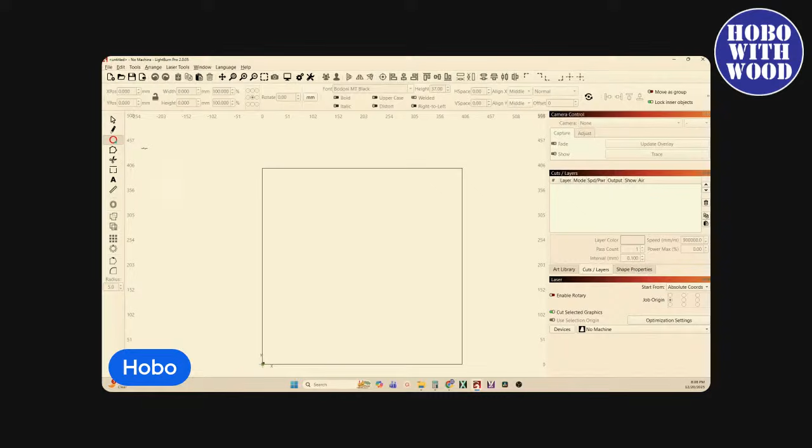So let's jump over here to Lightburn. I'm going to grab an ellipse and start with a perfect circle. I'll come in here and draw the perfect circle, and let's put it in line mode.

All right. Well, I know that my perimeter — and I say that because it's not a circumference, since my head's not round — but my entire perimeter was 24 inches. You can't just put 24 inches in here, because this measurement is the diameter, not the perimeter or circumference.

So how do you get that size right in Lightburn? You divide the perimeter — 24 inches, in this case since we're working with a circle, so it's 24 inches in circumference — by pi. 24 divided by pi.

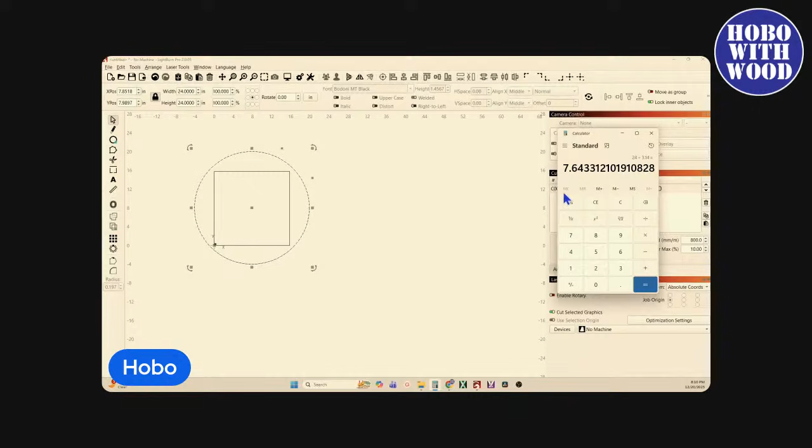So let me clear and switch back over here. If I've got 24 inches divided by 3.14, I get 7.64 inches. So I can take that value, 7.64, and keep my aspect ratio locked until it reads 7.64.

Now, that should be — if I come down here and get my measuring tool and click on this, we should see... yep, right here, the perimeter length is 24.005. So that's 24 inches, which proves that dividing by pi worked. So you take that one measurement, divide it by pi, and that gives you the circle diameter you need to create your first measurement for your hat size, your headwear size.

But our heads aren't round. Yeah, Terry, it's math, but pi is all you need. You need to divide by pi — in a minute we're going to multiply by pi, 3.14. This is about as easy as anything you can do.

Kevin says 24 inches. Holy crap. Well, wait till you measure your own. It's surprising how big that diameter or that perimeter is.

I measured 24 inches divided by pi, and got 7.64 inches in diameter. When we look at the measuring tool of a circle with 7.64 inches, the perimeter length is 24 inches. So there I've got a perfect circle that's 24 inches. But that's not what I need.

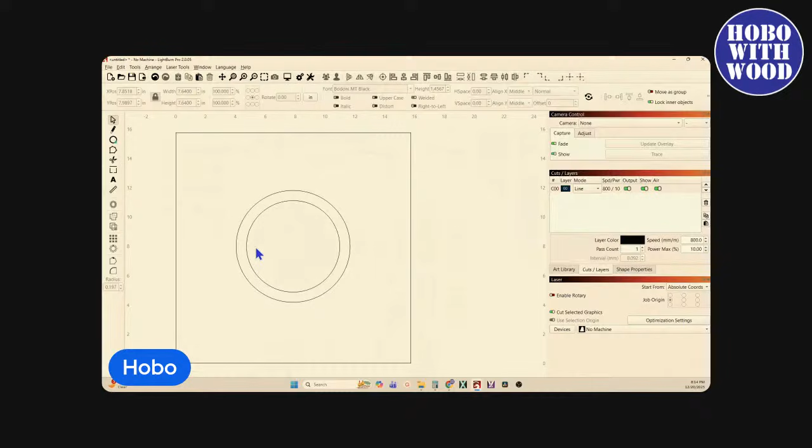I'm going to duplicate this and move it over here just for a second. So I've got my original. This one, I'm going to unlock my aspect ratio, and I'm going to tell the width to be 6 1/4. So now I've got the width correct.

But if I go to my measuring tool and look at that piece, you can see now it's 21.8761 inches. I've lost, was that 2.2? Is that right, 2.2 inches? I've lost 2.2 inches in that total perimeter length.

So I tried doing this by percentage earlier, and it didn't quite work out. Percentages, it doesn't work, but it gets you close. So I'm going to just start increasing it by 10%, and I think I'll probably end up doing 1 or 2 more. But let's see here what the comments are.

When a baby's head is 19 inches at birth, 24 is not that far off for an adult, I guess. Who you calling an adult? Those fighting words. The battery is dying.

Use printed scale on, yeah. Battery's dying, and I just use, like I said, this works. You know how I know this works? Because that's how I got these measurements, and it's a cutting. All right, let's see, no need to remember...

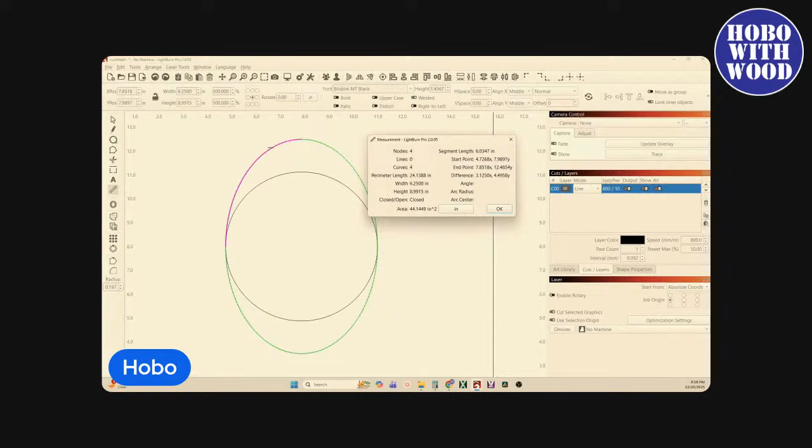So yeah, we'll go down 0.5%, so we're going to say 99.5%. And using the measuring tool, there we got 24.06, and that I'm happy with.

So now I've got the width right, and I've got the total perimeter correct. I use perimeter because it's elliptical, not a circle, so it's not a circumference. Now I've got those two measurements correct. It looks kind of funky, but believe it or not, that's what the head shape is.

Let's see here. Shame the measurement tool doesn't work in reverse - put in 24 inches and it gives width and height for the shape. I don't follow you. I have a hard time comprehending what I'm reading, I've told you guys that. That's the stroke, I can read. I don't always follow, but I'm not picking up what you're laying down there, Chris.

All right, and who mentioned pie? What kind? Sounds good, apple a la mode. Apple a la mode is my favorite.

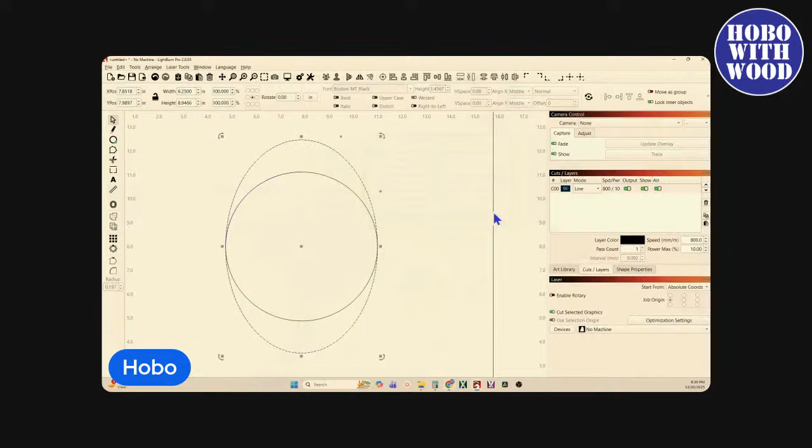So now I'm going to say okay, for the bottom ring, I'm going to take - I can delete that because I got it over here. So there is the shape for the bottom piece. Now I'm going to take that and duplicate it, move it over here so I've got it. Now I'm going to do an offset, an outward offset, in inches, so we'll do 1 inch outward offset and say okay.

Do not delete your original. And right now, let's group those. And there is the ring.

If you're doing this for the first time, honestly, since we're not doing this the way any real - oh fudge, I just forgot the name of the hat maker. Tell me, what's the proper name for a hat maker? I know it, and I just went blank. But a hat maker would never use this technique.

But it's going to work for what we're doing for something we're going to cut with a laser. Mad Hatter, haberdasher - thank you, Grafting Gene, thank you, haberdasher. I knew that, I just couldn't think of it. I'm the Mad Hatter in doing this, and I'm no haberdasher by no means.

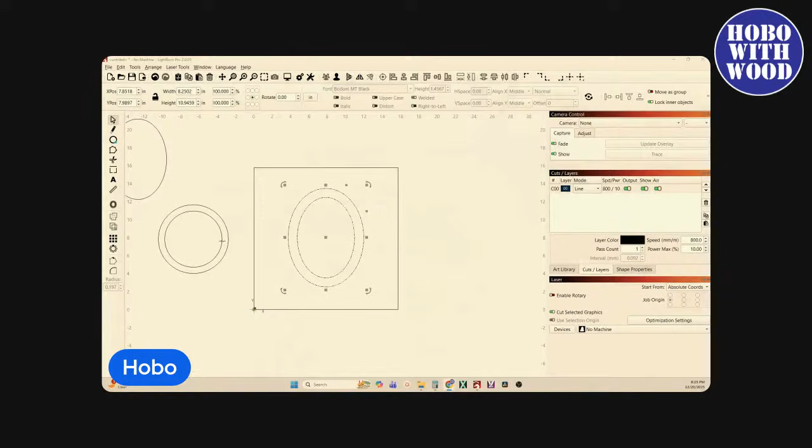So I had measured that and had 6 1/4 inches. So I'm going to duplicate that, bring it over here. And that is - actually, let's see, how...

This is almost finished, I'm having to think for a second. I can simply do a 1-inch offset of that, and that gives me that arc that I needed there.

Let me look here, hold that thought for a second. I don't want to steer you wrong, or tell you something when I've already done a couple of these, because I don't like to do anything I haven't tested before sharing with you. But let me look here.

That and that, and go back there.

What's an elf's favorite candy? Keep it PG. Keep it PG.

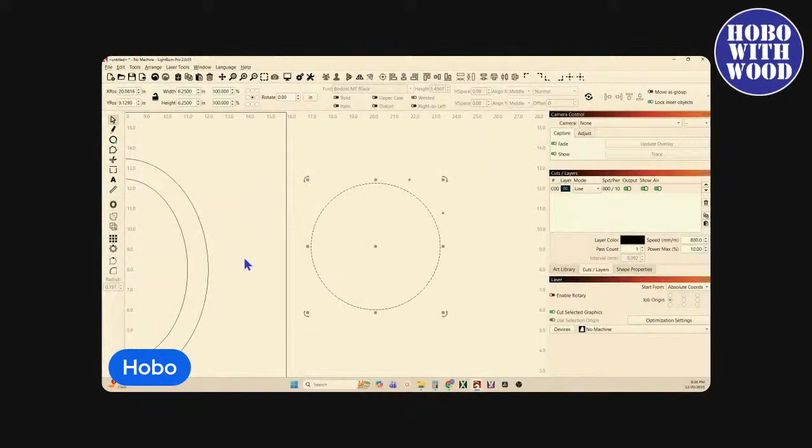Now, swap that back over here. So I've already got this measurement, and that fits from here to here. But let's just give this a 1-inch outward offset, and let's draw a straight line and tell that to go to the center of that.

And now I'll use my scissors. Get my scissors, there we go, and cut away that. So now I've got that piece.

Staple the hat on? No, we're not going to staple the hat on. All right, so switch. The rolly's finished, I've already cut. That's how quick it is, very, very quick cutout. I'm not going to do, well, yeah, I am. Let me switch this over on the rolly.

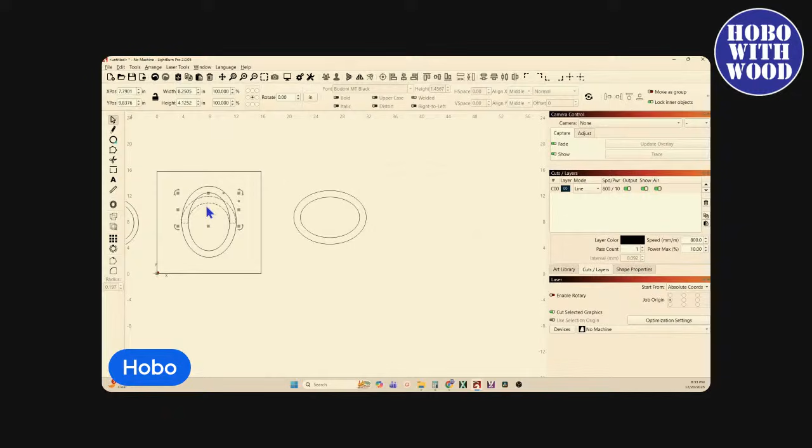And so we've got two of the three pieces that we need to make an interlocking piece. So I'm going to grab this piece, duplicate it, bring it over here, and then rotate it. Now you can see that measurement there. So I need to go from here to here, but I'm going to take this, duplicate it, bring it over here, because this is going to tell me how high this needs to be. I know how long it is from this point to this point, but this is going to tell me how tall it has to be.

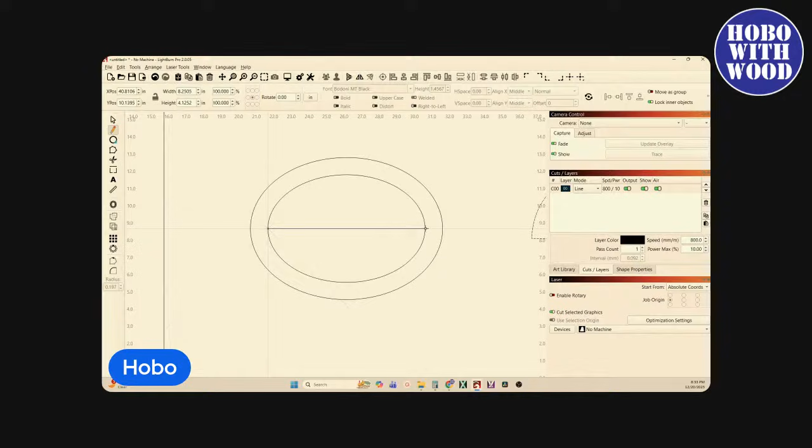So I can come in here and grab me a pencil, and I'm going to come right there to the center point and draw a straight line until it intersects again right there. And there is the total length from minus the offset. So I've got that measurement. So let's grab that.

And this piece, if I come over here and bring a guideline from there, then grab my measuring tool and measure straight down from the center, holding shift till I get to right there. That's 3 1/8 of an inch, or 3.125 inches. Or for you metric loving folks, that's 79.38 millimeters. But I'm going to stay with inches. 3 1/8, 3.125, all right.

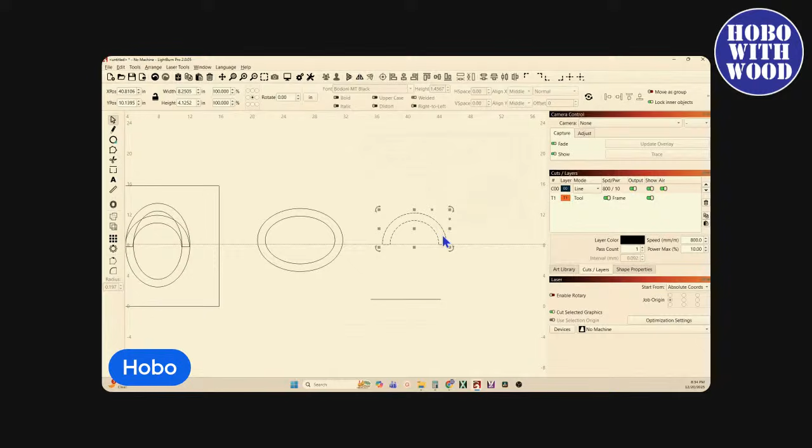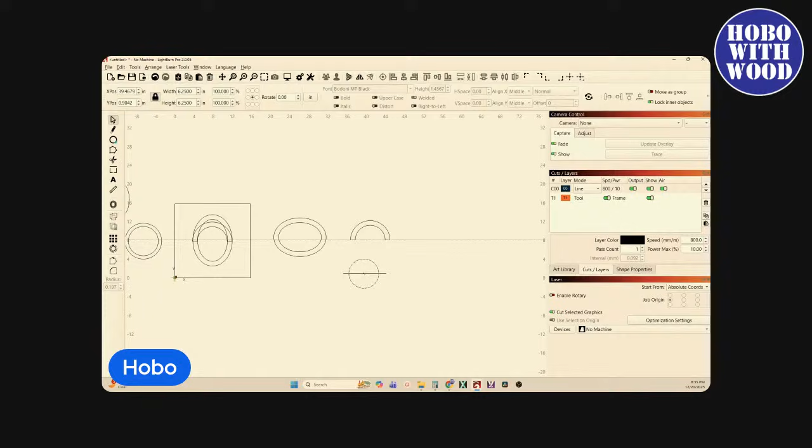So that's a radius. So if I come over here, I need to lock my aspect ratio, and I want 6 1/4, which is what we had a minute ago. That's how high it's going to be, but I need it to be that long. So there is my 6 1/4 centered up over that. Now I'm just going to stretch this out, stretch it out to right there.

Or let's take Control Z. I already know that line's length, 8.9466. So unlock and tell it 8 point, what was it? 8.9466. There we go. And now I can do an outward offset, 1 inch.

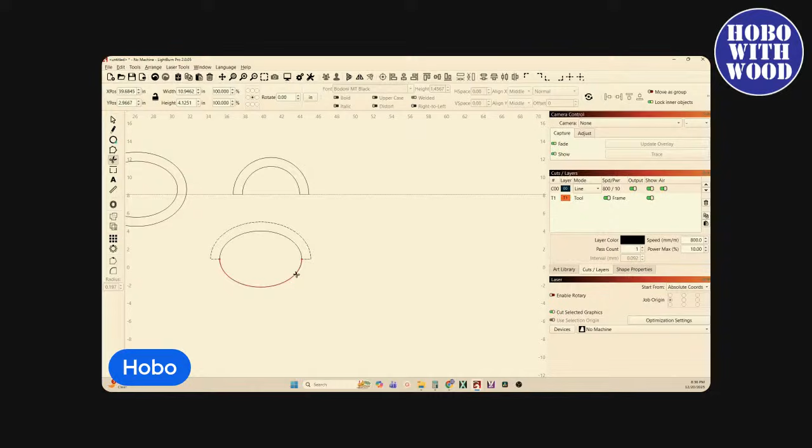Do not delete the original. Say OK. Grab that line, hold my control button and drag it past it. Grab my scissors, cut, cut, cut, cut, and cut. There is my third piece.

So there is my lower brim. There's across my ears, and there's from the brow to the back of the head. So it was that easy and that simple to create the 3 pieces I need to interlock with each other.

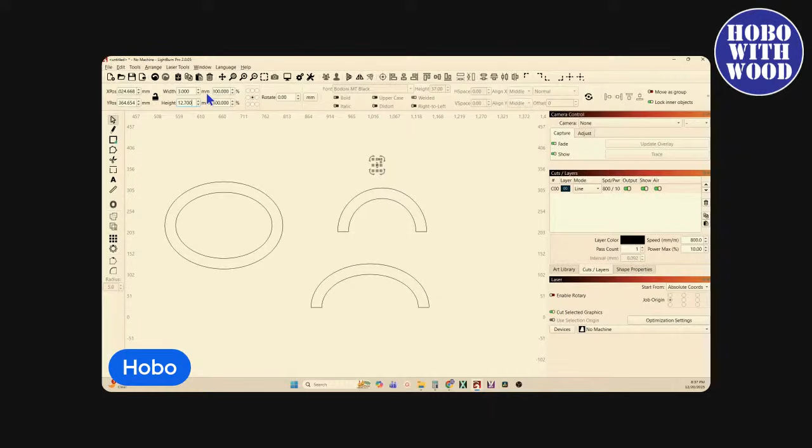Now get the interlocking pieces. I'm going to come over here and grab my rectangle tool. And I'm going to tell it to be, we're going to go back to millimeters, 3 millimeters wide. And I did an inch, which is 25.4 millimeters. So 25.4 divided by 2 gives me 12.7. That's half of the width of these 2 pieces.

And if I take and grab my snapping guide right there, I should be able to find my snapping point. And right there, there's center. And then if I duplicate that and bring that down here, grab my snapping cursor right there and look for that same point. Come on. And when you can't find it, just select it and tell it to go to center. There you go, now that's centered up.

But, and I'm glad to see you guys are answering the questions. 1.5.06 is where they introduced the scissors. Jack Shop says scissors did not show up until 1.7. Greg says 1.5.06.

And if you don't, let's see, Control K is the shortcut. I don't see the option to turn on and off just the scissors. You can turn that menu off, that sidebar, but I think, correct me if I'm wrong, Chris or Jack, if they have the update that has the scissor tool, as long as they have that toolbar over there, it should be showing.

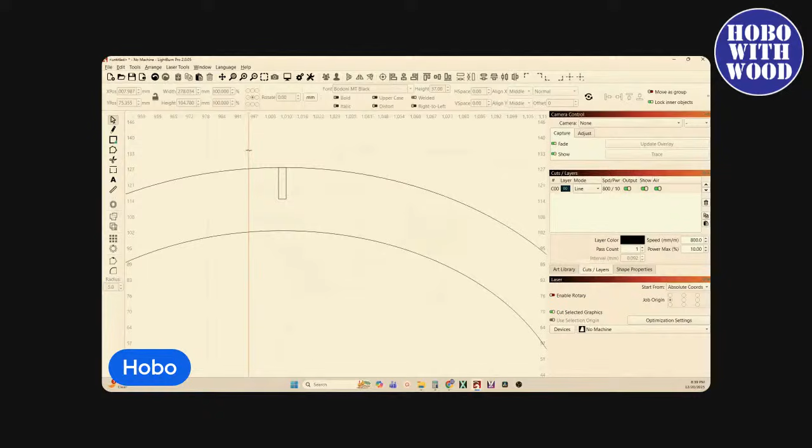All right, so back over here. I've positioned, I didn't want to bring that out. All right, so I've positioned these. I've got one on the bottom and one on the top. But did I do it right? So what you got to think about...

I'm wanting to create these so that they interlock. And then I'm going to have a place on it where I can attach antlers, Happy New Year 2026, whatever you want to put on there. So when they interlock together, that piece has got to be unobstructed. And since I want it facing out this way, then it's got to go on the narrower piece. So let's see here.

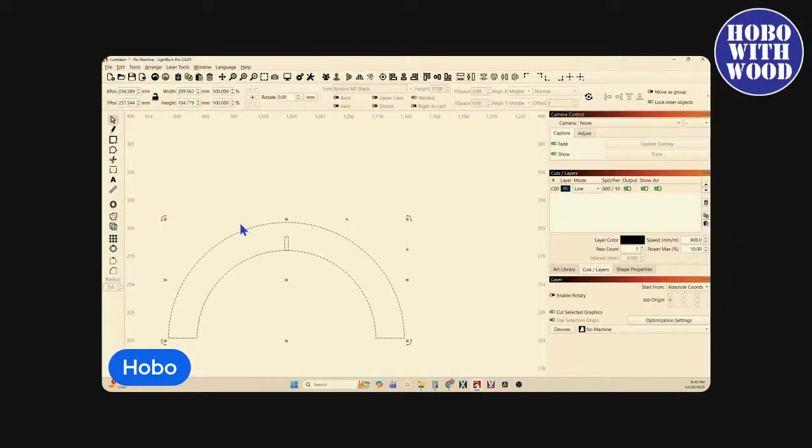Go back here, and switch you over. So I actually need to have this on the smaller piece at the center and the top. And this one, I can't do center bottom because it's going to drop it down to the bottom down here. So I just need to bring that down and get my snapping cursor right there. There it is, so that's where you need it. You need to have the cutout in this. Is that it? I want to make sure I got that right. I'm 90% sure I got that right.

No. Yeah, yeah, so the small one has the cutout in the bottom. So I had it right to begin with, dummy. Just undo. There we go. There. How do I save preferences?

File, preferences. Open preferences, import, export, load preferences. It automatically saves your preferences. Does it not? Yeah.

Settings are updated every time you save or close Lightburn. So if you set up Lightburn the way you want it, with the tools displaying where they are and everything configured the way you want, when you close Lightburn it's going to save that as its latest preference. Then if you open Lightburn and for some reason it doesn't open with those preferences, you can go under File, drop down to Preferences and Load, open your folder for your preferences, and import or load your preferences back up. It should open a whole list, and if you know what you wanted the last time you used Lightburn, just load the last one. But it saves your preferences every time, it updates them every time you close Lightburn.

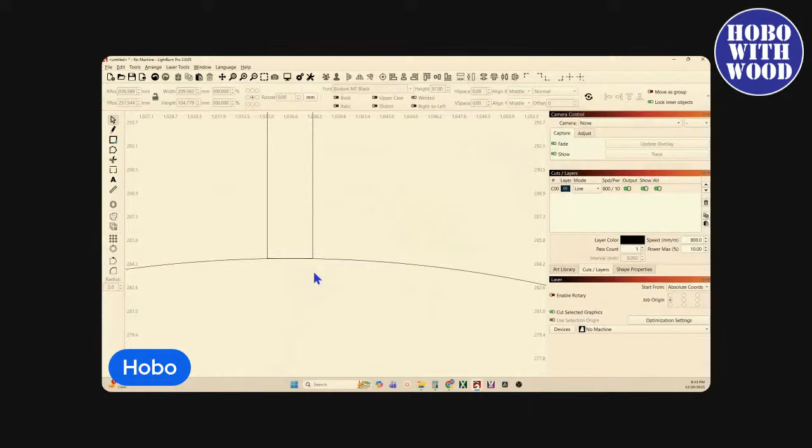Now, you've seen I snapped the center of that 3 by 12.7 rectangle to the line of that arc. But because it's an arc, it's not going to be contacting all the way across. I'm going to zoom in and show you this. So I've got that snapped in, but if you look, you see how that's proud over here? It's not all the way down because that is an arc. It's touching in the very center where it needs to be.

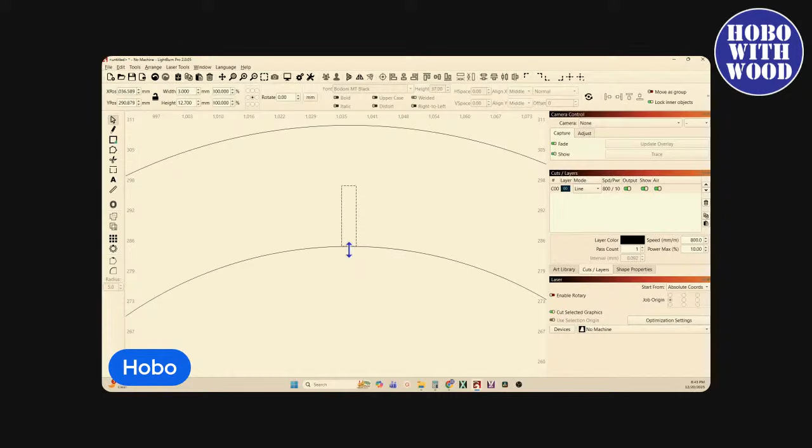So in order to get your cutout correct, select that. Don't drag the entire thing because this line here is crucial. All you got to do is grab that and extend it past, and the same thing down here, just grab that and extend it past. Then you say A, subtract B. That's subtract, and that gives you that. And you say A, subtract that, and that gives you that. So now those are going to interlock together.

And now we need to have these be able to interlock in here. You need somewhere for them to snap together here and here, and then opposite for the other side. So I'm going to do the same thing. I'm going to create 3 millimeters by 25.4 divided by 2, or 12.7 millimeters.

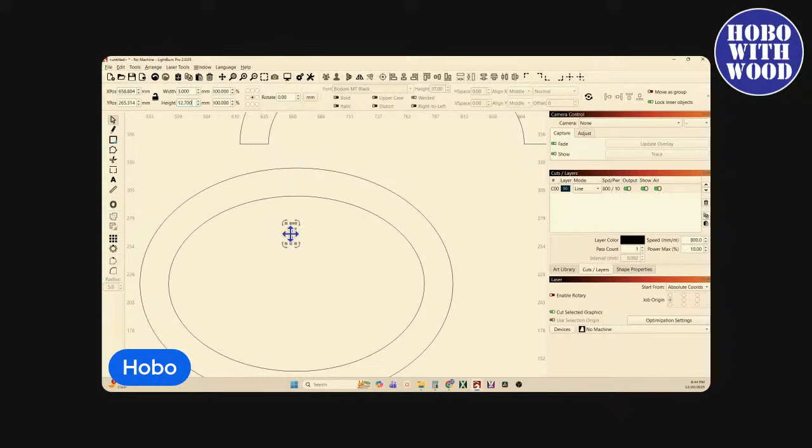And I'm going to tell it to go to... well let's see. We've got to ungroup that because I had those grouped, and I only want to select this one. So ungroup it, and then I want to tell that to go to the center of this. Then I'm going to use Alt-Shift-V to have it dock right up against it. Alt-Shift-V moves it right down to that line.

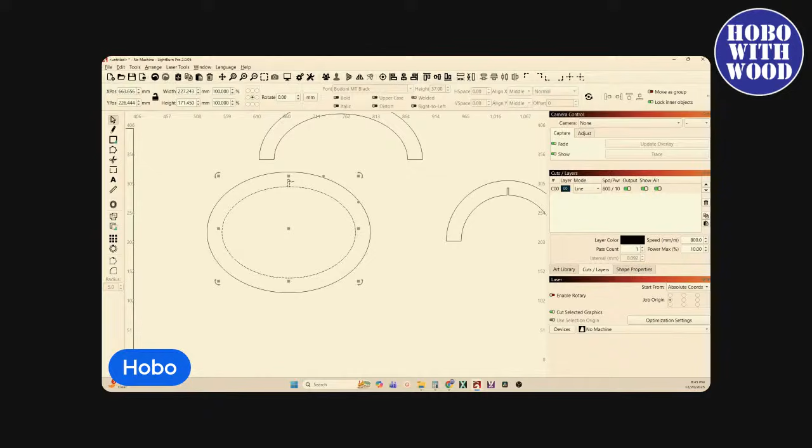Now, I didn't do this when I created my first template, but I'm going to try this. I'm going to try using the circular array tool and see if it'll give me 4 of those in the proper position. So with both of those selected, selecting the rectangle first, circular array - nope, it's not going to work because the circular array goes from the center of the last selected object. Let's try turning off 'use last selected as the center.' Turn that off - nope. So it's going to rotate from the center of that ellipse, even though it's an ellipse, and it's going to rotate in a circle because it is a circular array.

So I can't do that, but I can do 2. Now that I've got 2, they're directly opposite - those are in the right spot. So I can say okay. Then I'm going to ungroup them because I had them grouped. I'm going to duplicate that, Control D, duplicate it, rotate it, and then I want to bring that one over here and tell it to go to the horizontal center, and then Alt-Shift-H to bring it right to that line.

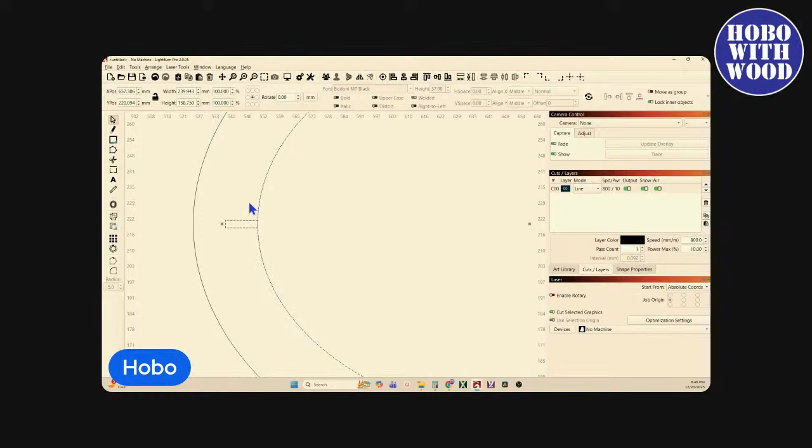Copy along path - I hear you, that'll work. What do we love to say here at Hobo with Wood? There's always another way. I didn't even think about trying the circular array the first time I was doing it, and copy along path would work. But you've seen I was able to use circular array to do 2. Now let's try copy along path and see how that works out, because I need to do another one directly opposite.

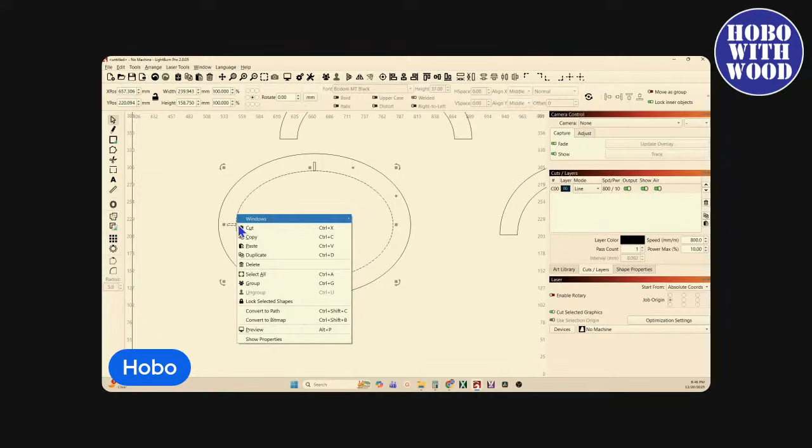So right click - nope, right click doesn't have copy along path. So, hold shift, select that, go to arrange, copy along path, and I only need 2 copies. There we go, so that worked.

Now, just for grins and giggles, to show if it works with all 4, we're going to delete those. That's in the correct position. Hold shift, select that ellipse, go to the arrange menu, copy along path. We want to rotate the copies. There we go, so that worked. So with copy along path, and telling it to rotate the copies, we'll put all 4 of them in the right spot with one application of one tool.

Would it affect art gallery and art library? I'm missing out on some of those. No, your preferences will not changing and loading your preferences are not going to affect your art library or your art gallery, if that was your question, Greg.

All right, now I've got the same problem. These are on an arc, so they're not completely touching at the corners. The outermost corners of those pieces are not touching the arc, so they have to be dragged in order to be able to get a clean cut.

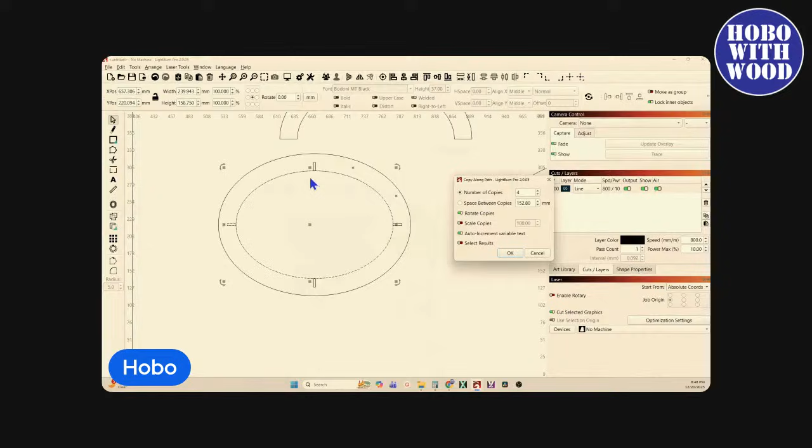He's saving things to reload after update. Okay, all right, so you got to do the same thing I did a minute ago where we elongate those, but we don't want to move the position of them. And if I say okay, got that done. So come in here, select that, and it doesn't matter how far you drag it out. Just drag it out to where it's going to be inside the circle.

Now, there is a problem with this design that Lightburn doesn't like, because the gurus decided when they created the resize slots in selection tool to leave this option out, because they thought it would create more confusion than it would be beneficial. And I've run into this a few times with my designs where I need it and it's not there. I don't agree with them leaving it or omitting it from the tool, but I'm going to show you.

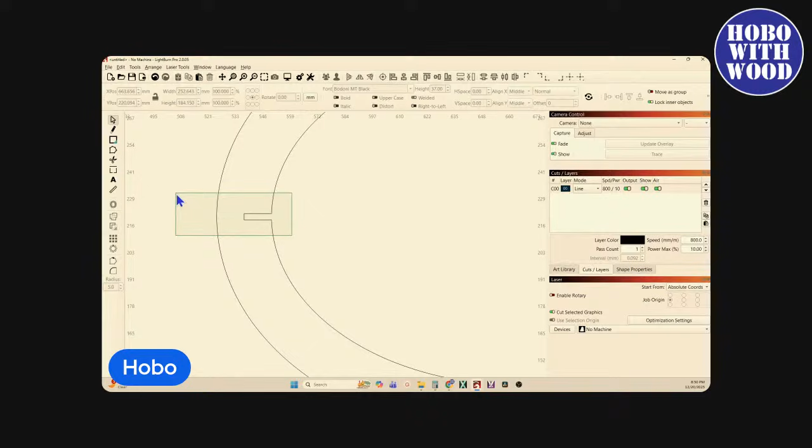So I've got all of these. I can grab the 4 of these, group those, and now I need to select the innermost one and this, and now I need to add those or weld those together like that. Now, by doing that, it actually subtracted it from the unit, the one piece. So those I actually added to this one inner circle to create the subtraction of the entire unit.

And where the problem comes in with this, I've created this with 3mm widths for all of these slots and tabs. But with this one single piece, because these are slots, I don't think it's going to work. Let's see if Lightburn will recognize them as a slot. I think you have to do it as a tab, but these it's been a problem before.

If I go to tools, resize slots in selection, slot width, say 3mm, and we want to change it to 2.7mm, and let's give it a 0.5 millimeter tolerance. So it's not recognizing those as slots. And the reason that it doesn't recognize those as slots is it's only a slot when you're looking at it as a whole. The two pieces together, that outer cut and the inner cut, that's when that becomes a slot in that entire piece.

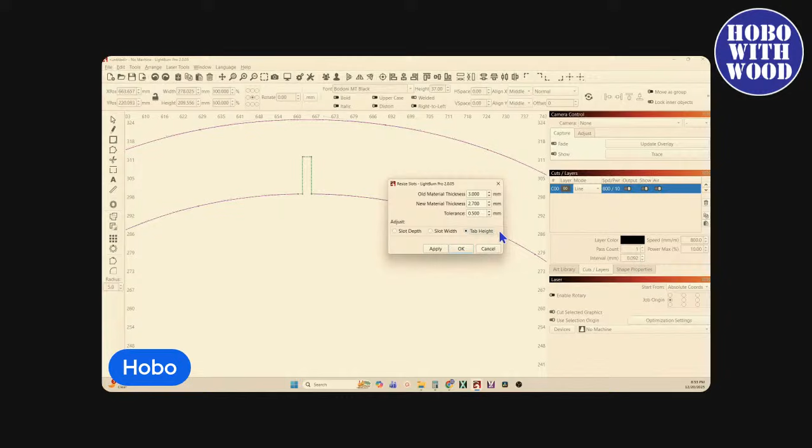We can change tab height, but you can't change tab width, and tab width should be here. But now we've got slots for these to interlock, we got slots for these to snap in, but we don't have the tabs for them. So we'll come back over here and we'll give it a 3mm. This is going to be 25.4 divided by 2, or 12.7, and 3mm.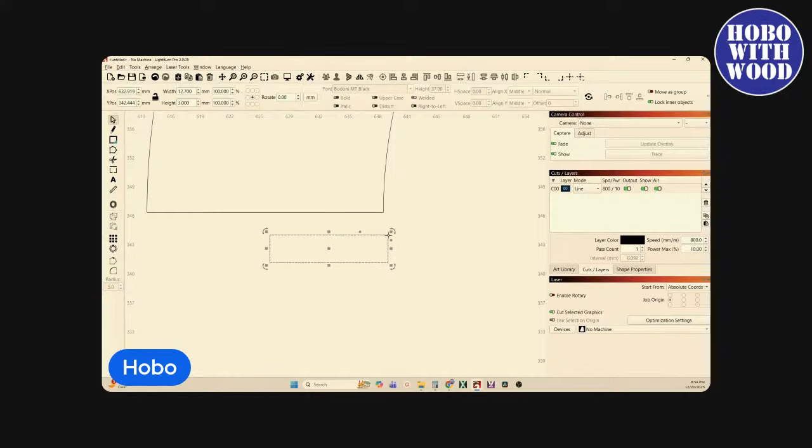And I'm going to put that right on the corner. No, on this corner. My bad, about messed up. Put it there. Control D. Oh wrong, that's Control S, can't do that, cancel that. Control D, duplicate it, bring that over here.

Group those. Let's duplicate that and bring those down here. Group those and weld that. So now those have got the tabs on it. Now let's give these their proper position. Group them so they're one unit, then select that and weld it, done. So now that's done. Those are all going to interlock and snap together, and you're going to have a nice tight fit.

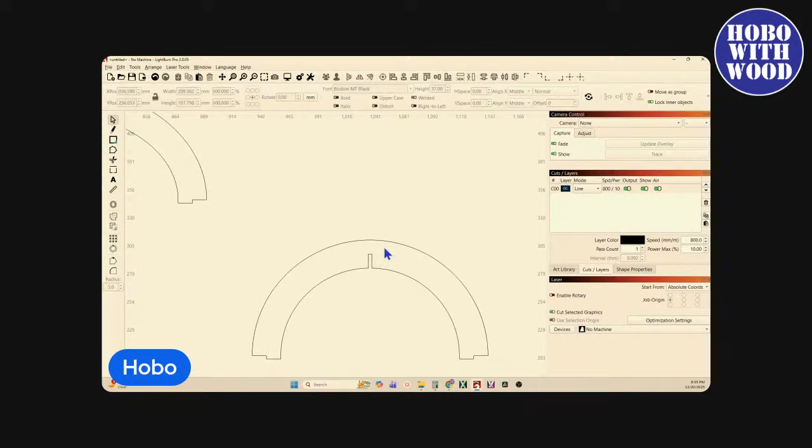Now this is the piece I want to modify and create a place to mount my artwork. So I'll just draw a straight line. I'll grab my pencil tool and draw a line, not worried about the length. And I'm going to grab that line and tell it to go to the center.

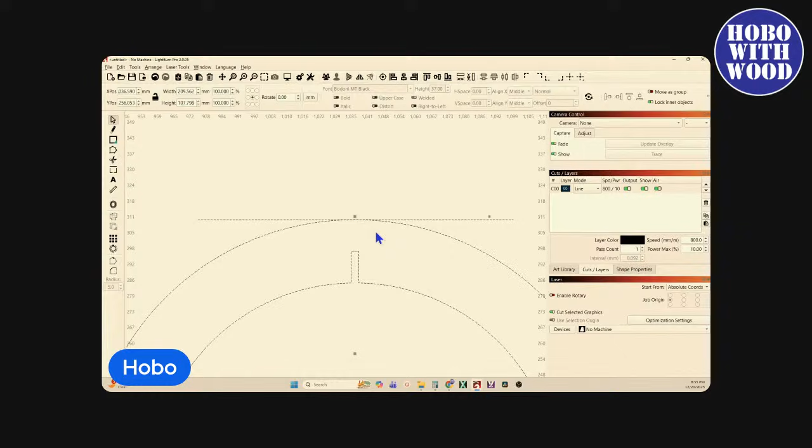And then Alt-Shift-V to get it to the very top. Now I need to bring this down 3 millimeters. I've set my arrow movement to 1 millimeter, so I can select just that line and arrow it down 1, 2, 3. And that's where I want to flatten it off.

I'll use my scissor tools again to flatten here, here, and here. All right, how long is that? That measures 49.85 mil, so it's right at 50 mil, or just under 2 inches.

That's fine, so now I'm going to come over here and create - let's say I want to have 3 tabs across there. So 3 tabs would be 4 spaces, so it's going to be a total of 7 units. I'm going to tell the width of it to be 50 mil divided by 7, and you'll see why I did that in a second.

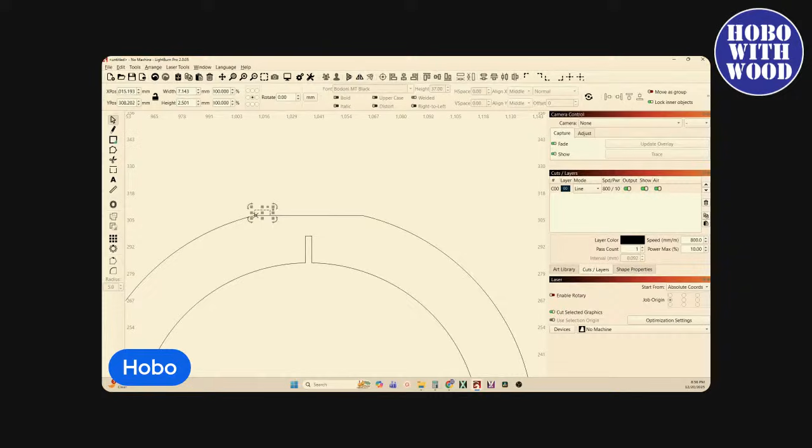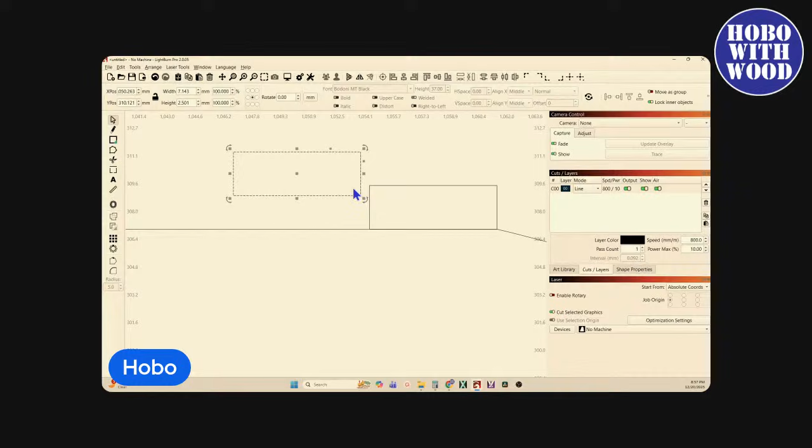I'm going to grab that, bring it over here, and put it right on that corner. I'm going to duplicate it, then tell that duplicate to align to the bottom of that one - Alt-Shift-H, bring it there. Oops. Grab this one, come over here, and snap that to that corner. Create a duplicate and snap it to that corner.

Now I'll grab that one and bring it over here, and I love this tool - I love the distribution tools. I'm going to put this over here real close and just tell it to align to the bottom of that one. Now I've got these 2 end pieces positioned correctly. So select all 3 of those and tell it to distribute selected objects horizontally with even space between them. So now those are evenly spaced across that measurement.

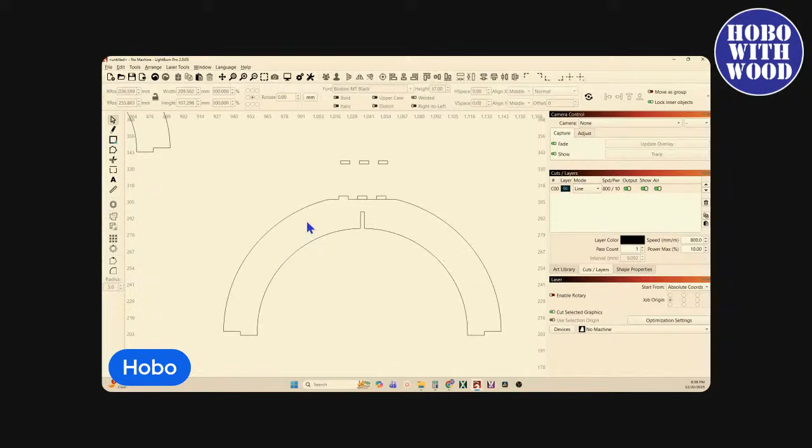I can duplicate that because I'm going to need that in a minute. Oop, didn't mean to do that - Control Z, grab the middle. There we go, I'm going to need those in a minute. I'm going to group them and weld it. And it didn't do that - it didn't weld up the way I want it to. But these are grouped when that happens, and it happens a lot.

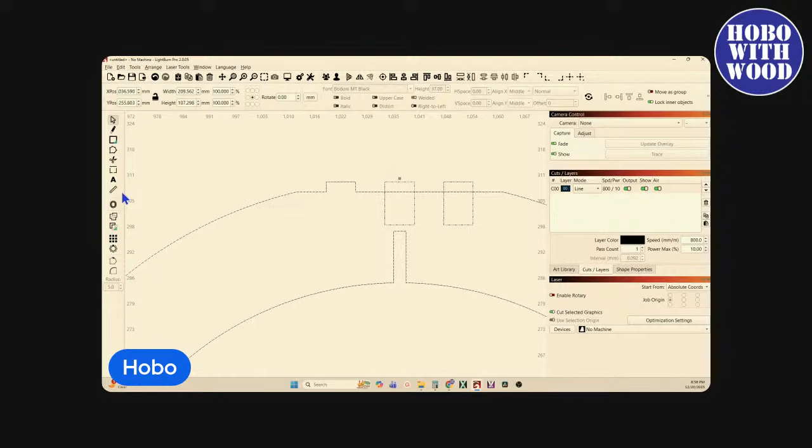Even though they were all aligned perfectly on a straight line, sometimes LightBurn does that. Just ungroup it, then select the 2 that did not weld up, and bring them down - it doesn't matter how far, just bring them down. Group those back together, hold your shift button, and weld those together. Done. All right, so those are now set up and in their proper orientation.

Now I'm going to come over here and grab a rectangle, and we'll say, all right, now here I'm going to make a piece that's going to snap onto that top piece that then I can snap artwork onto. So those 3 tabs are going to be in the center, snapped to that center rib. So in order to snap my artwork on, I've got to have room outside of those to snap that artwork on.

So I'm going to, if that was 50, we're going to start at 75 mil right now and see what that looks like. That looks pretty good. I'm going to group these, put it in the center of that.

All right, and now I'm going to get a rectangle, and it needs to be 3 mil - I'll just, it's close to 10, we'll make it 10 mil. And I'm going to put it in the center, horizontal center of those. So now it's lined up.

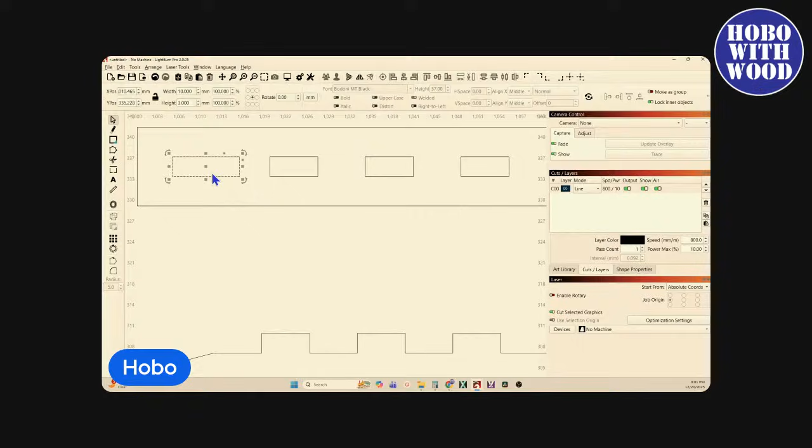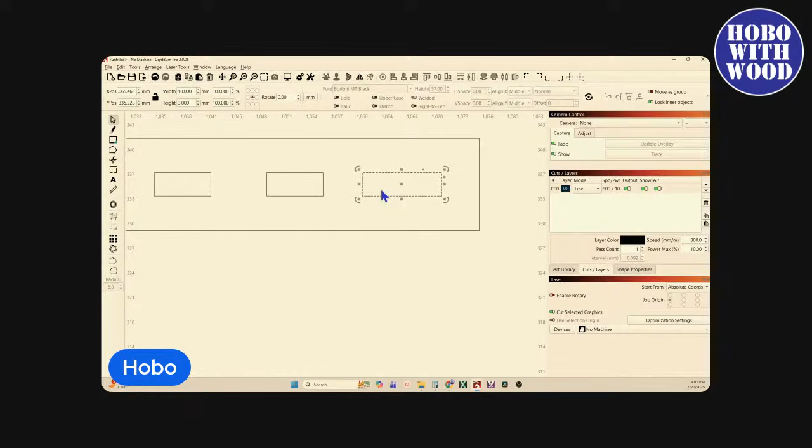So now I want to get that slot duplicated, move it over here. Right now, I'm not going to worry about my OCD and getting everything exactly positioned. I'm just going to eyeball these. I'm going to look to see, using my shift arrow to move that over incrementally to about there. That looks pretty close to centered there. This one, I'll give it just a little bit more, about there. Then I can group those, and once they're grouped, select that rectangle, tell it to go to center, and now they are exactly centered up in that piece.

I need to take that and duplicate those two, because those are going to be the piece that needs to go, the tabs that go on the artwork. And this piece, I'm going to round over.

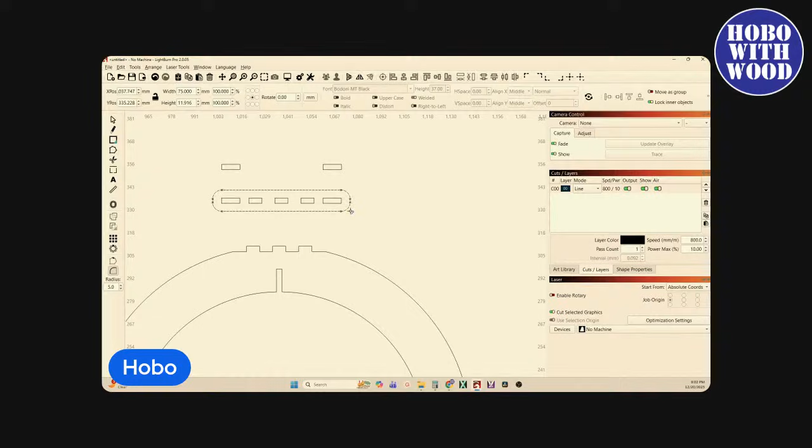It's right now right at 12 mil, so we're going to give it a radius of 5 mil. That's good. So radius there, there, and there. Just round that over. And I want to do the same thing on all these other corners.

In fact, I can just leave it at 5. So come down here, radius. Anything that's going to be on my head, I don't want any corners poking me in the head.

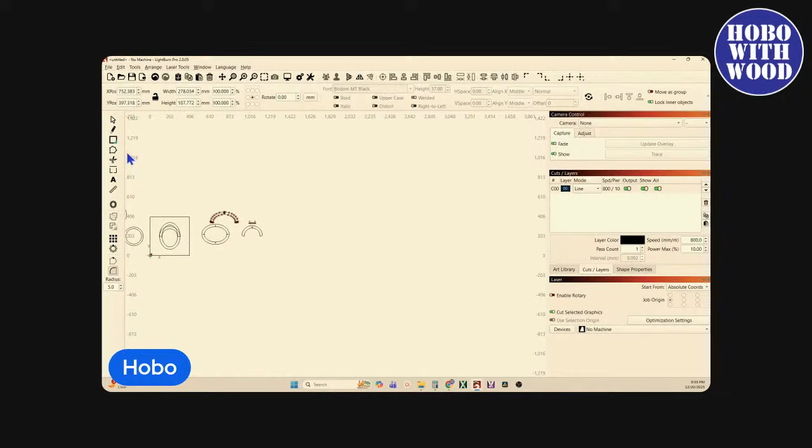All right, so that's done. Move these over here.

That's done. Now, whatever artwork you want to put on the top of this, if it's going to be antlers, if it's going to be Happy New Year 2026, Merry Christmas, or if you wanted to do a Santa hat, it's very important that you don't make it so large that it's going to make the top portion of that headwear want to slip and slide or fall off your head. So I wouldn't make it any taller than the actual height of the headwear itself.

So let's see here, I just want to make sure I've not missed anything.

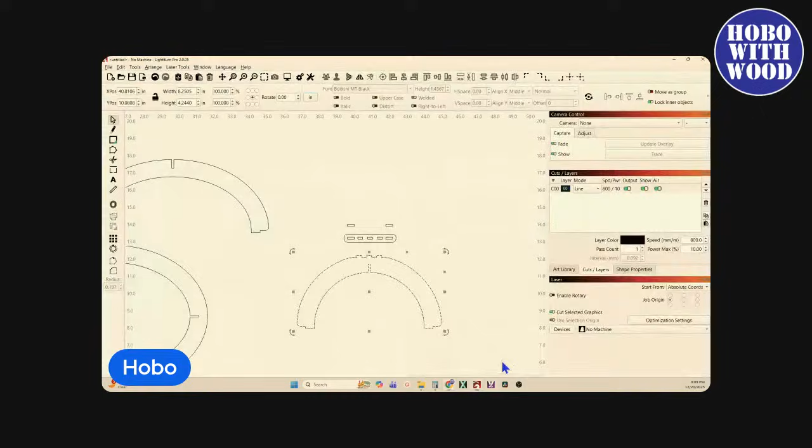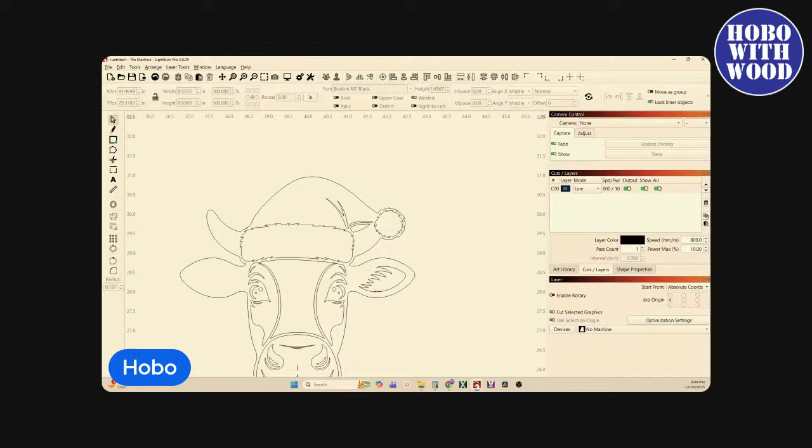There it is, all right. Now that I'm signed in, I should just click download now. Now that it's downloaded, I can go back over to LightBurn and import from my downloads. Okay, I got that cow. Now, I don't need any part of the actual cow itself - I don't need that. I'm getting rid of all the pieces.

And now I can come in here and actually do an outward offset to about there. Say okay. And now use the scissors to get rid of that, and that, and that. There. There.

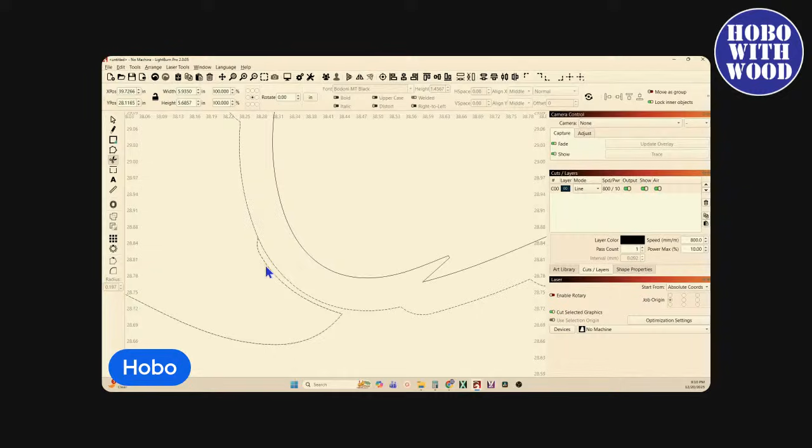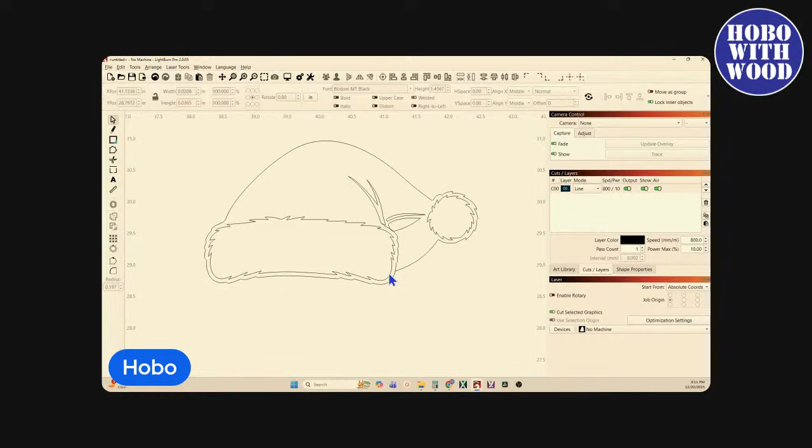There's a little place there, but I can get that with the selector tool. So, delete that - now I've got just the hat. Let's put that in fill mode, see what that looks like. That's what I thought, so I've got an open shape here. Edit, close path - it didn't close path. Oh, that's because this here, dummy - I missed that cut, got to cut that off.

There we go. And now I'll go back to wireframe mode and get rid of that. And now you're in a fill, and that looks right. All right, so I'm good with that hat. I'm going to group all that together and tell it to be - well, that's good.

That's 4¼ inches right there. No, that's width - I want 4¼ in height. Oh, I need to lock my aspect ratio. Lock that, undo that, lock that back. 4¼. There we go.

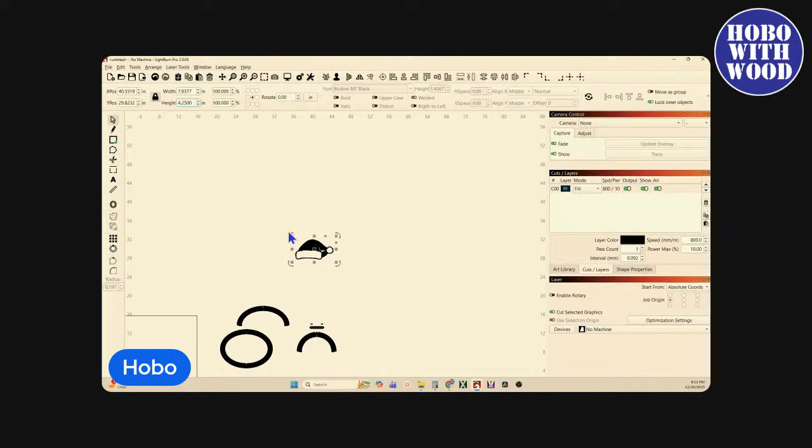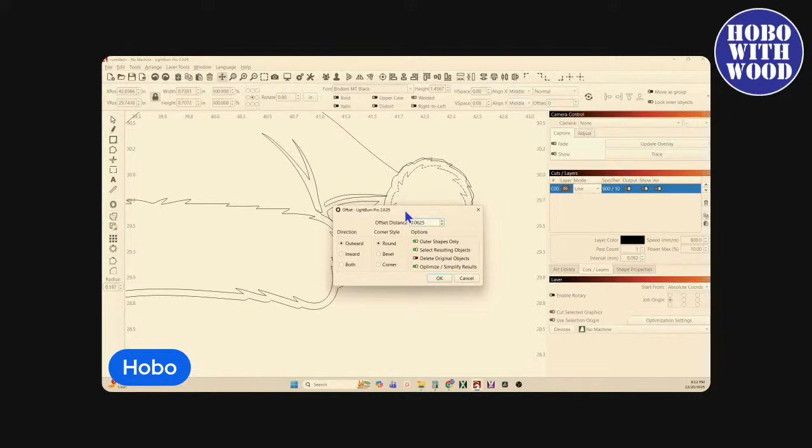Oh, the horn outline - yep, get rid of that. Oh dummy, golly, I needed that line. Control Z. I should have done an offset of that instead. And say okay, and let's delete that and get another offset. I missed that - thanks for the heads up.

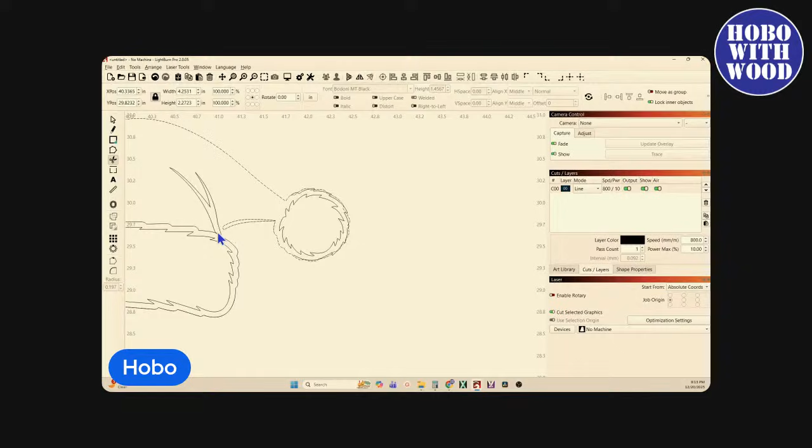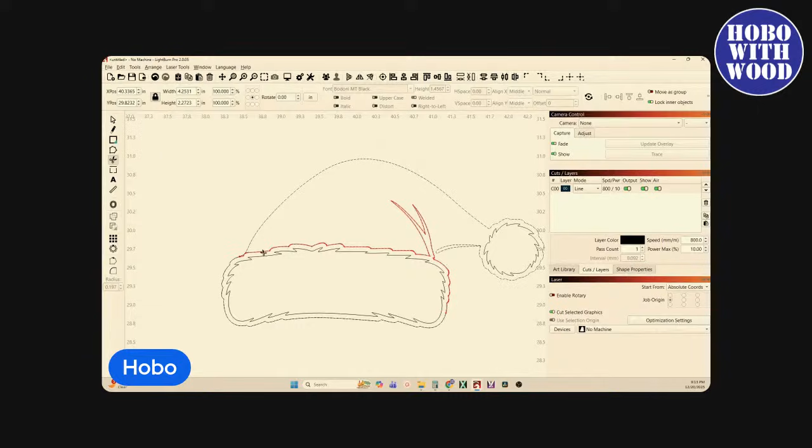Now I can get my scissor tools, get rid of that one, and get rid of all of that. There we go, that's right. And that'll have to be changed, morphed over a little bit. Had a little bit more work than I thought, but we're getting there - that goes bye-bye. I need to go into node editing, and I'm going to grab this guy and bring it up here. Oh, I had too many.

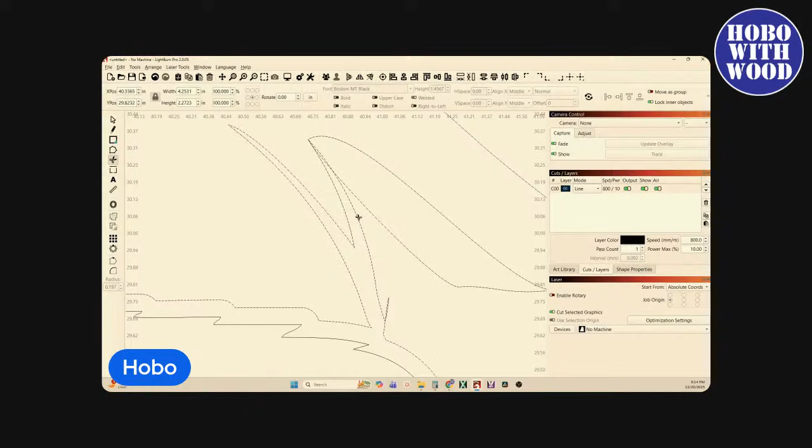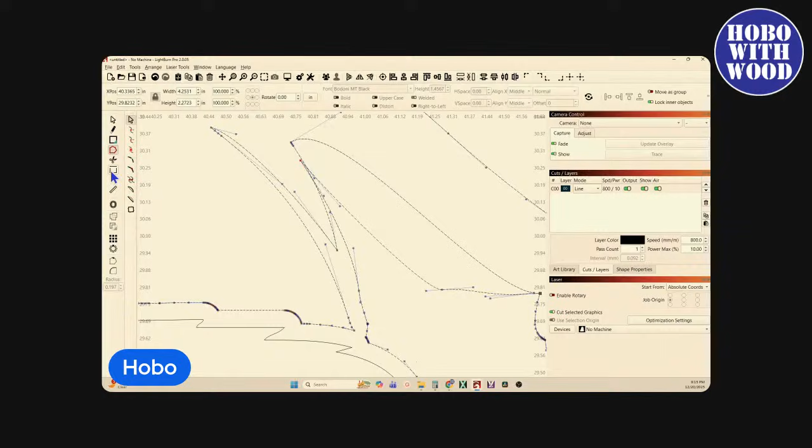I'm missing something. Oh, I needed to overlap up there, I think. Like that.

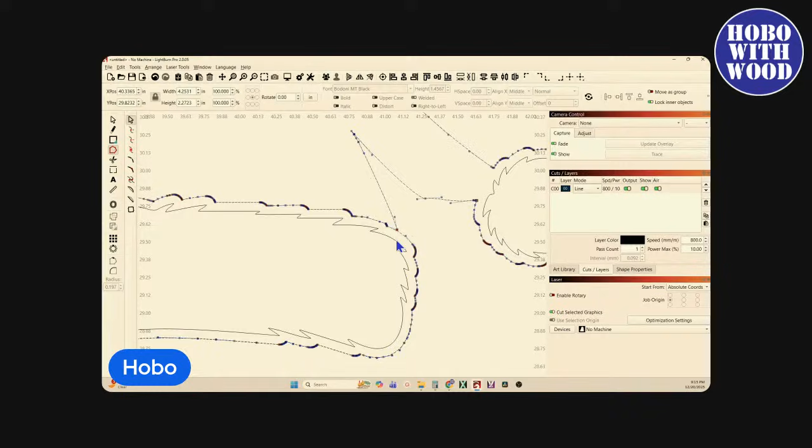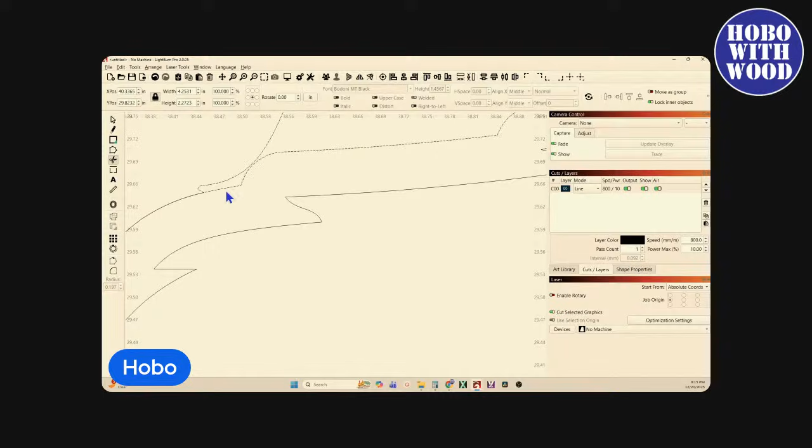And close shapes, edit, close path, fill mode. Oh, still open somewhere. Edit, go node editing. There.

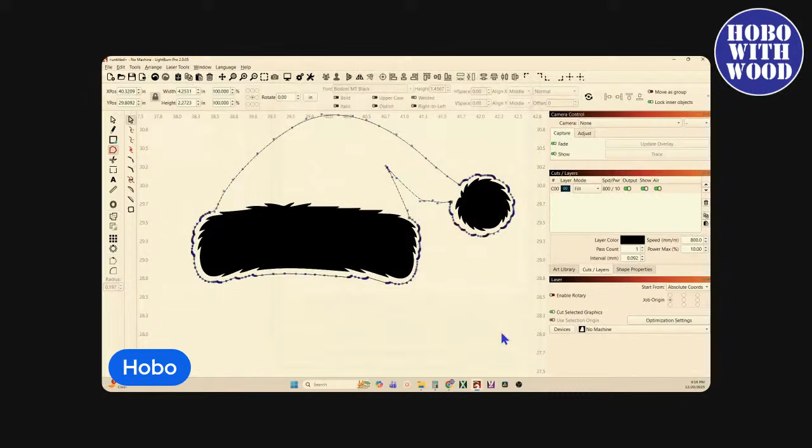I'm getting off on a tangent, and that's not closing together. Alt J, join. Nope. Tools, close path. Let's see, edit, close path. What are we doing? I don't want to do that. Edit, close path. It's not closing.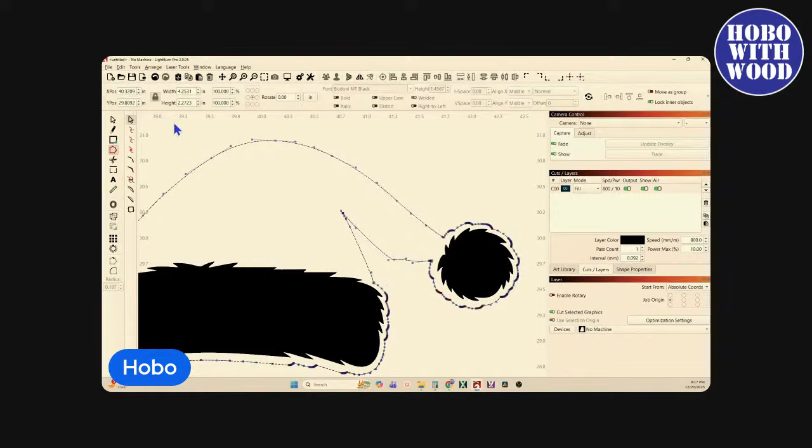That's not snapping together. Oh boy, why is it doing this to me? Why? Because we're live. Alt Shift W. I go into node editing and grab those open nodes right there. That should snap together. They're snapping, but they're not closing.

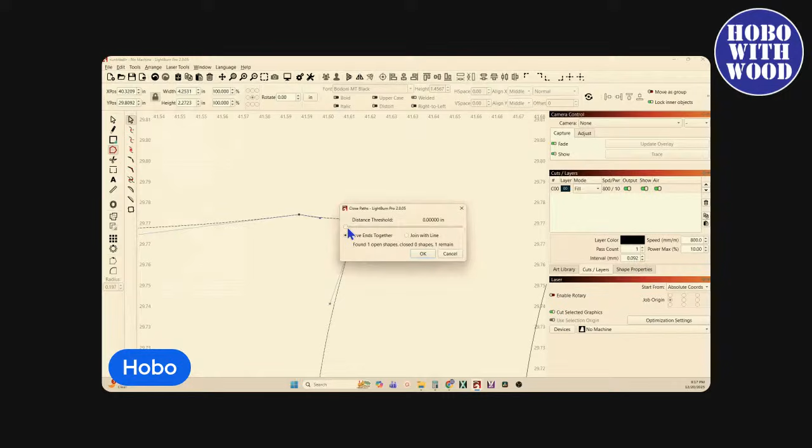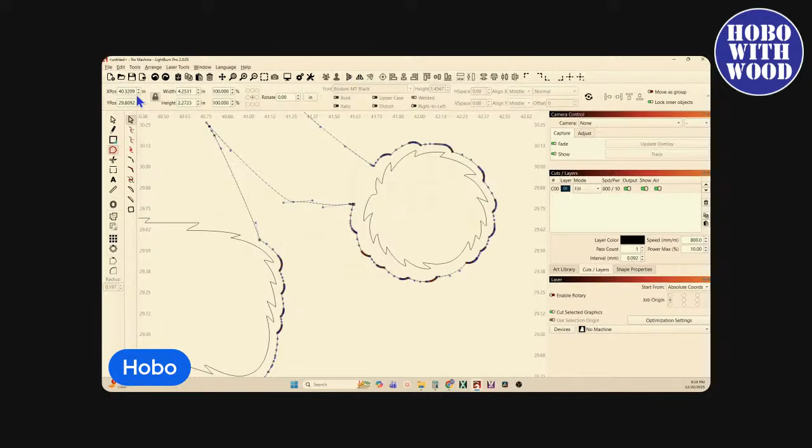Edit, close path. And it's not closing path. Close path with tolerance. Edit. Increase our tolerance. Yeah, then that's going to close it into a funky shape. Zoom out so you can see what it's doing. Edit, close path with tolerance. Well, when it finally does get it, there we go.

Say okay. Did that work? What is that? Is that a random peak? There we go.

Node editing. D for delete. Did that get it finally? Alt Shift W. No. That's still not closing.

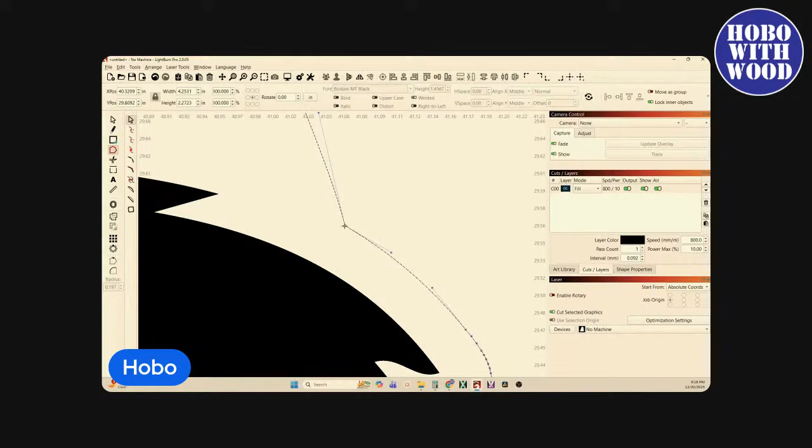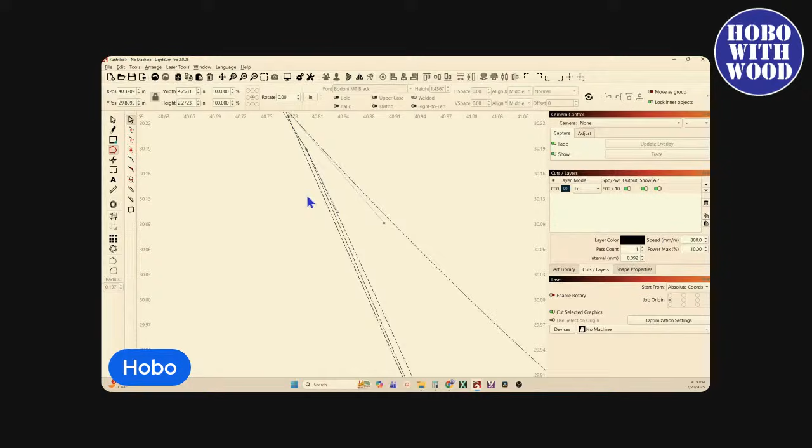Edit. Close path. Nope. Edit. Close with tolerance. Join with a line. Okay. It did some funky line, something there. But it's still not closed properly.

All right. This ain't about artwork and node editing. This ain't working. So I'll just show you what I did. In fact, let's do this real quick. Get rid of this. Get rid of this. And go back to line mode. All right.

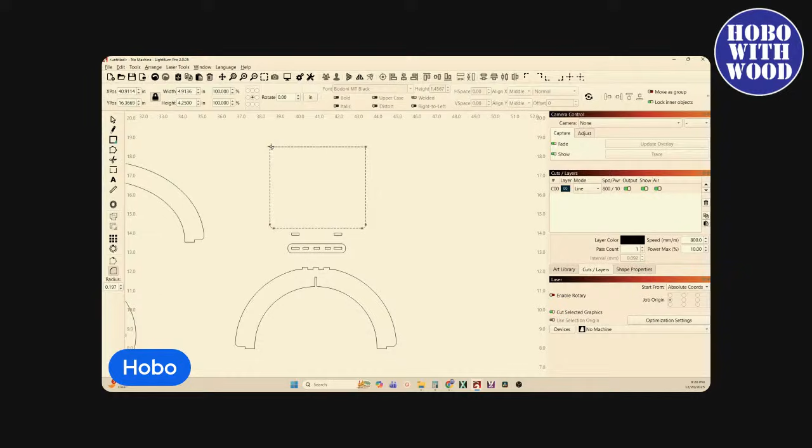If this is going to be my artwork and it needed to be 4 1/4 inches in height, I make my artwork be something like that. And let's put some corner or some radiuses on it. I don't want anything sharp around my head or around the little one's head, anybody that's wearing it.

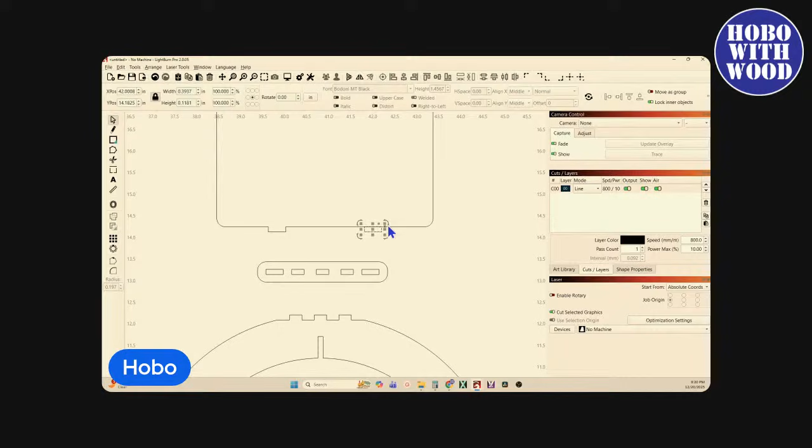Whatever the artwork you decided it'd be, it wouldn't be a rectangle of course. Make sure that those are centered up, and then Alt-Shift-V for vertical and weld those together. It didn't weld those together. Ungroup it, grab that one and just grab that one and elongate it, and then weld it. And now that will snap into that once you assemble your hat.

Now let's do that. Let's grab these pieces off with a laser. These have been cut out when we started today's show. And I haven't cleaned these or sanded these or done anything. Straight off of the laser. Got my little piece for the artwork. So I've got my brim.

These are going to interlock together and fit flush. There we go. Then you would glue these all in place. You're going to glue these. If you use wood glue or super glue, just make sure your glue's dry before you test fit it. You don't want to super glue it to your head. At least I don't want to. Some of you might, I don't know.

All right, so now that those are interlocked and locked into place. See there? Look at that. Ain't that a pretty darn good fit?

All right, done. And now you can take your piece, and it's one thing I forgot to tell you about, and I got to go do that because this is crucial. This is crucial. And I didn't do it. I did it on mine, but I didn't show you on here. In order for this piece to snap in there, you need to make a little notch for it so that it fits flush. And I didn't show you that. So let's go do that now.

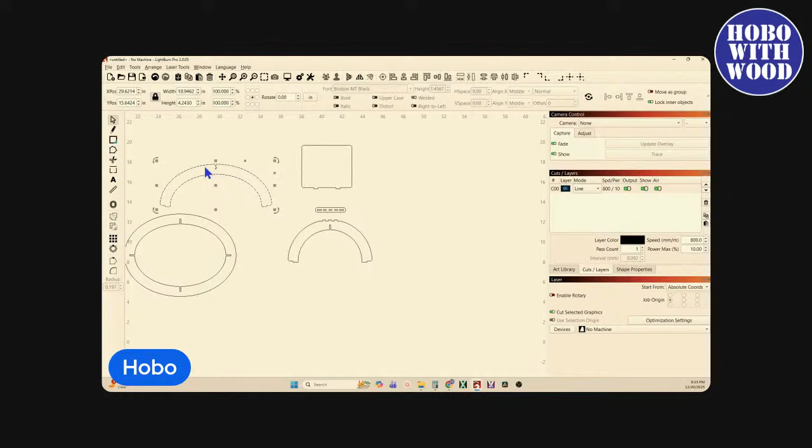We still got a few more minutes. So back over here. Oh, wrong button. That's good. And that button. So this piece, how wide, how tall is this? This is millimeters, 12 millimeters in height.

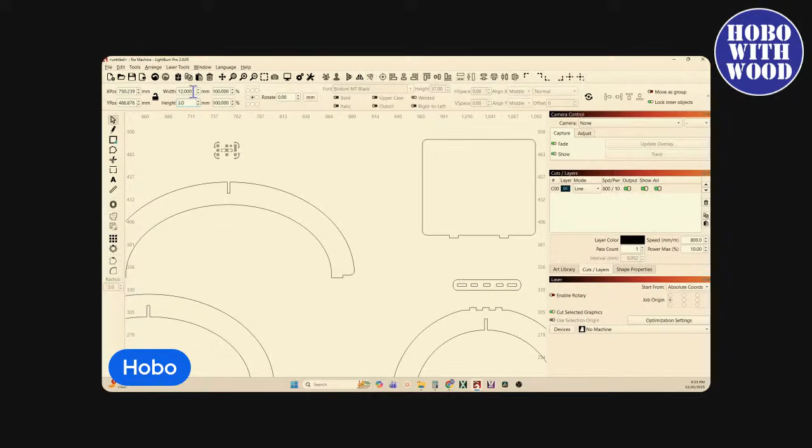So you want to come over here and give yourself a 12 millimeter by 3 millimeter. Oh, aspect ratio needs to be unlocked. So 12 by 3. And you're going to bring that down here.

And what you're going to need to do is go to the, not that side, go to the vertical center. Is that vertical center? Yeah. Vertical center. And then align it to the top. All right. And now, select the outermost piece, subtract that piece there. And that gives you a recessed area for that piece, your artwork mount, to mount in there and be flush or flush-ish with your piece.

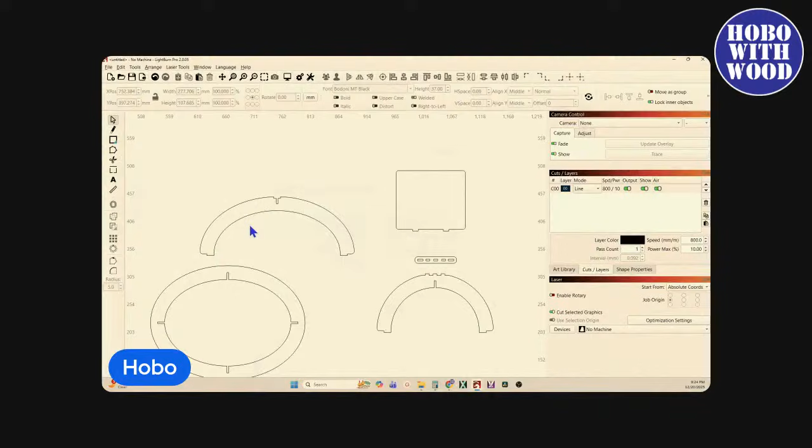Now, you can, if you wanted to, you could come in here and create a second rib to go across there. You don't need it. Once you glue this up, it's really, really strong and sturdy. But if you wanted to, you could go back into your artwork, your ribs, and put artwork all along in here. You can engrave that, make it pretty, or do cutouts.

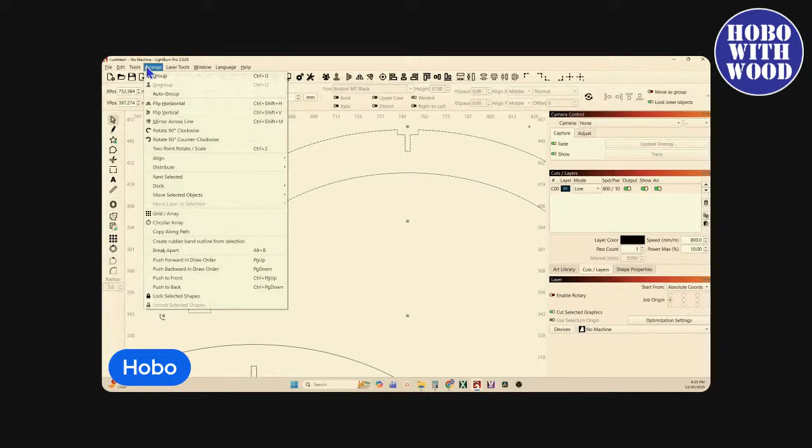If you wanted to come in here, and we have our star now, come in here and just put in some random stars. I'm just curious what happens if I select that and then arrange and copy along path. Yeah, that works. Let's zoom out so we can see it. Arrange, copy along path.

And you can rotate the copies. You can change how many you put in there, change your vertical spacing.

Because of our notches in there, that kind of works, kind of doesn't work. But it works enough to get my 8 copies, and then you can just space them out and do what you want to with them.

If you're wanting to keep this under $4, we did this with one sheet of material and a scrap piece to make your artwork, because it can't be too big. It can't be a full sheet of 12 by 12 without issue. The total mass of your top piece needs to not exceed the mass of your lower piece, the weight. So whatever that piece weighs, you could do some long, skinny antlers, and their total mass would not exceed the total mass of the lower portion.

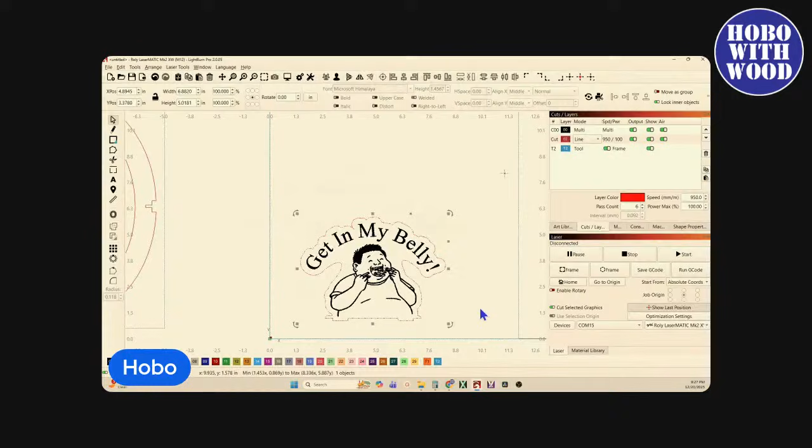Get in my belly. And I got a fat kid. Hello. And I started to put the hobo with wood on his t-shirt, but it was just going to take too long, so I didn't do that. So I got 'get in my belly,' and I cut that out and put it on the top of mine. And then I went a step further.

Now, if I could have stopped with that, I'd still been under $4 with my hat and done. But being that I am me, I had to take it just a wee bit further. And my hat...

I cracked myself up. I've got my 'get in my belly.' But on top of that, I've got a can of Coke. I got a milkshake. And I've got a cheeseburger in there. And it's got my fairy lights. And my milkshake's hanging a little low. I got to fix that. But I'm good to go. Get in my belly.

So, obviously, this ended up costing me more than $4. But you can do all kinds of wild and crazy things with that as a base skeleton. It works fine as is. You don't need to do any other addendums to it. Or you can cut it out and help create more artistic things in it. You want to be careful about how much material you remove, because you don't want to weaken the piece.